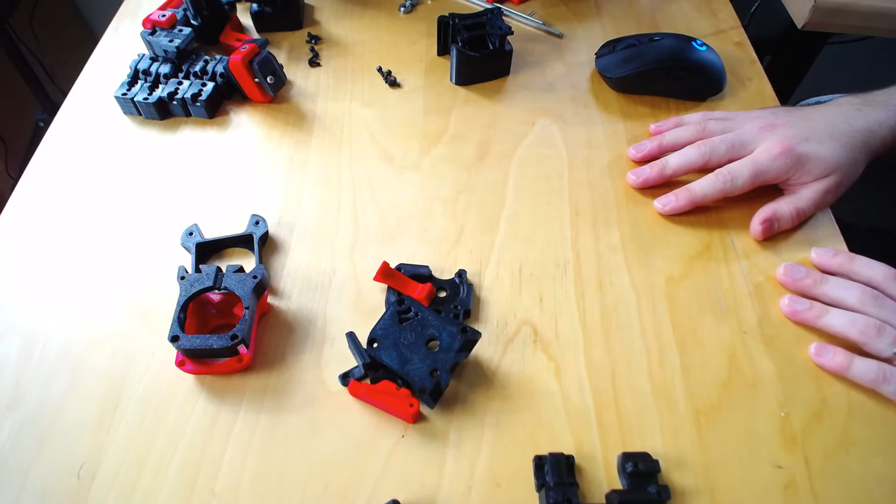Let me switch to this camera. I've increased the brightness here and tried to reduce the contrast some, because I realized whenever I was holding up these parts, the camera's focusing or doing exposure off the bright background, and the black kind of disappears. Hopefully it's a little easier to see this time.

Let's get started with the clockwork module. Let me open up the assembly manual, because I believe I know where all the parts go for the heat sets, which will be the first part, but I want to double check to make sure I don't make a stupid mistake.

One moment, switching over to the monitor. So last time we left off here with some of the Gantry stuff, and let's see here. Perfect.

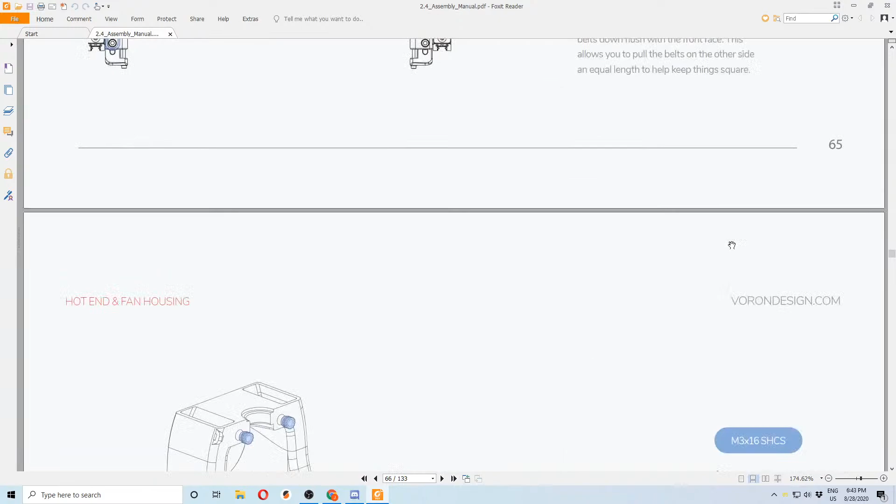So here's the Afterburner section. We'll pass the X carriage for a second here and start with Clockwork. This page here shows the different heat sets we need to insert.

And again, since I'm the glorious person who bought the wrong heat sets, I'm going to be drilling out the heat sets like I did yesterday. I'm going to switch over to this camera for drilling out the holes.

The other thing you may notice, I have 2 separate bags of heat sets. If you remember from the BOM, there were some long heat set inserts and short heat set inserts listed. Since I know some of these parts can fit the long heat sets, even though that's not spec, all you need to buy are the short ones. I'm going to put some long ones in, because I have a lot more long than short, since I've been using the short ones everywhere else.

Before we get started, I recommend testing the fitment of these 2 parts. If you were unlucky and received a very early or one of the first release versions of this part, whenever this lever comes flush with the rest of the part, you'll notice it starts getting pushed upwards. In this case, we're fine, but it's probably going to be really hard to see.

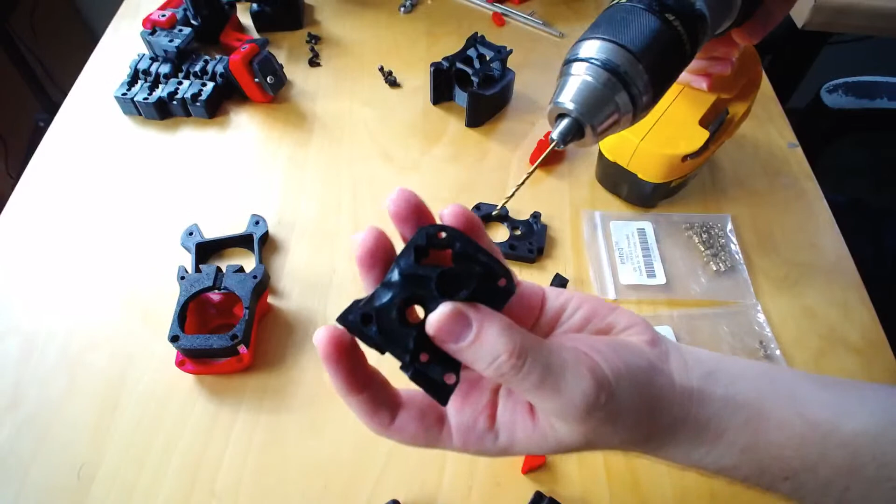This side is a little more restrictive, and most likely your part's going to be fine, but if you over extrude or anything like that, it's better to double check and make sure you can see through it. I'm looking through the part here and I can see the table all the way through, and there's no burrs or anything stopping the filament from going through.

I don't have a piece of filament here with me at the moment, but it's always handy to slide it through as well, just to double check. So there's that, and just a test fit of these parts so you see how they go through.

This is the shuttle here, and the small piece fits in there. Then here's the latch right here. So there's all those parts, and this goes up here like that. Since there's no screws or anything holding it together, that's generally how it ends up. So there's a lot of heat sets in this.

So let's get started. Let me preheat, let me plug in my soldering iron. I did have it preheating, but if you don't plug it in, it doesn't matter if you turn it on, it still won't work. There we go, now it's heating.

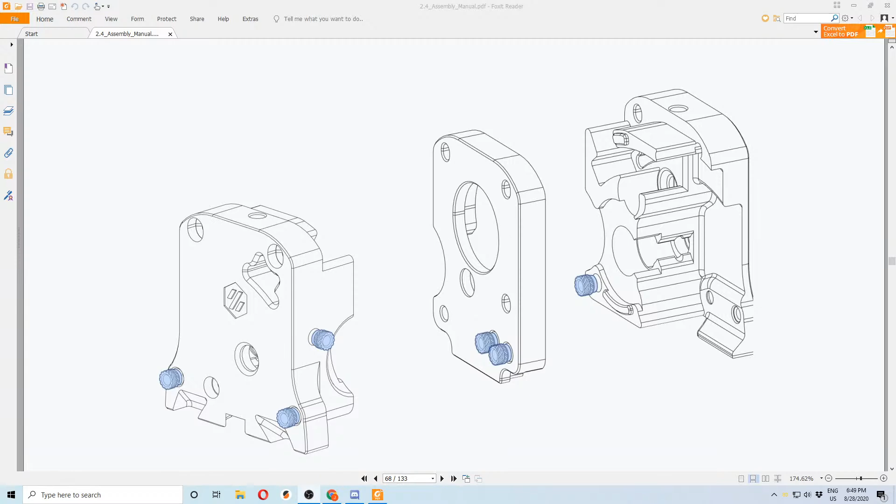Here again, we'll get started with this piece here. So if we jump back over to the overhead camera, that is these two holes right here over on the side.

For some reason that looks strange. Okay, yeah, I just wanted to double check to make sure I was doing it right. So let's, oops, sorry about that if you heard that. I'm just going to go ahead and drill this, and then drill this. Okay, so that's good.

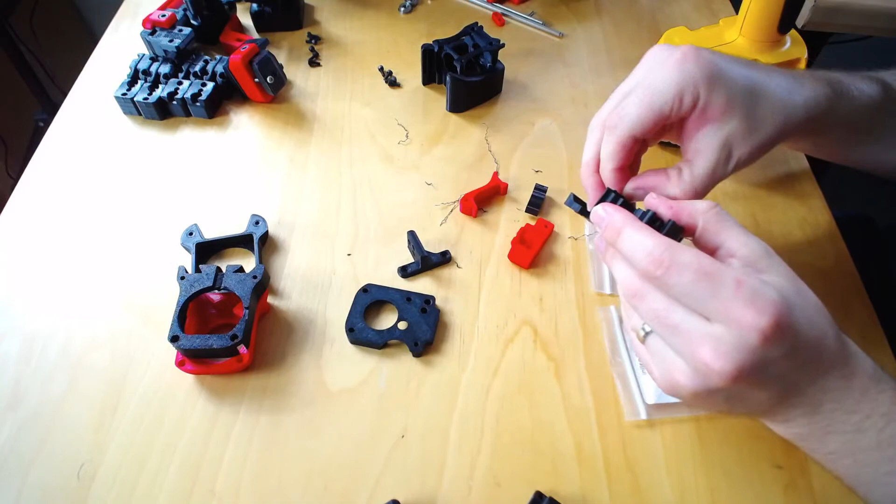And then on this part right here, there are two on these back corners, so I'll drill those out. And then there's also one right here on the front side, and that one's great for the long heat set insert because it's a pretty deep area there. And then the final one is on this side, that's to retain the cable cover.

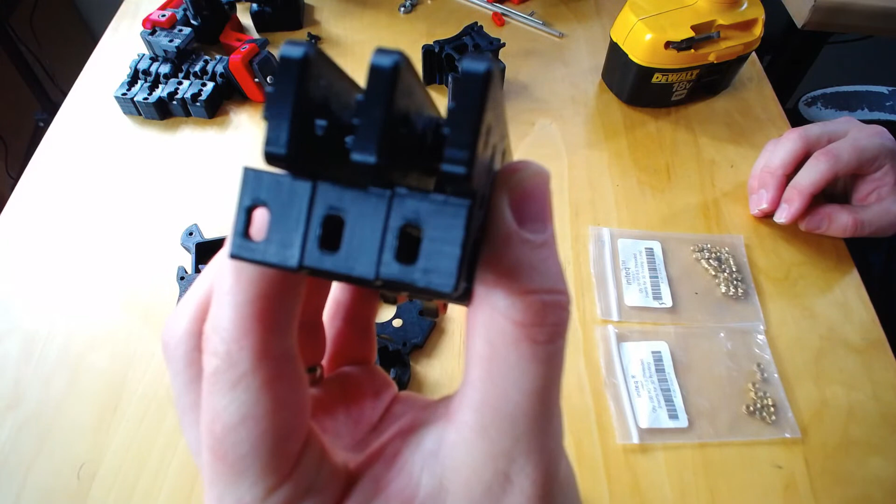These parts all kind of look similar. I was going to do a quick show of different settings, but since these are all black, unfortunately I don't think it's going to focus for me, so you won't be able to... maybe I get lucky, it's a roll of the dice. I wish I could specify where this was going to focus.

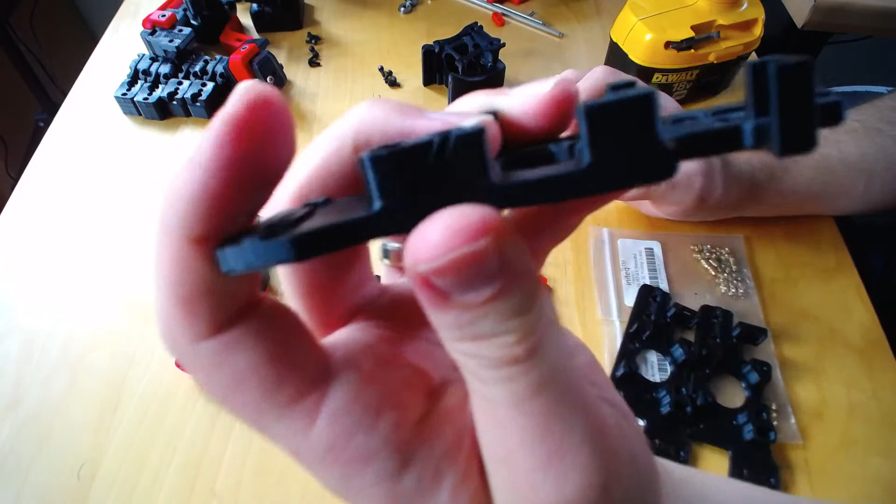But yeah, so the one thing about these AB drive mounts is that right around the base of these parts, there are some ringing features you can see, and depending on how these parts fit together, it can be a nice tuning test to see if your settings are good. And ringing does not affect performance, no, it just looks a little uglier, but it's not bad.

Just drilling out these holes here.

Okay, those are nice and clean. My table is now dirty. This one gets a heat set right on the end there, and that is so your thumb screw goes into that heat set.

And of course this one's probably not going to work very well because I don't have a lot of torque on it. And then this one doesn't need a heat set, and this one also does not need a heat set. So I think I may have completed all of these.

So now we're ready with these parts. Let's see, let me grab the BMG clone from the parts bin.

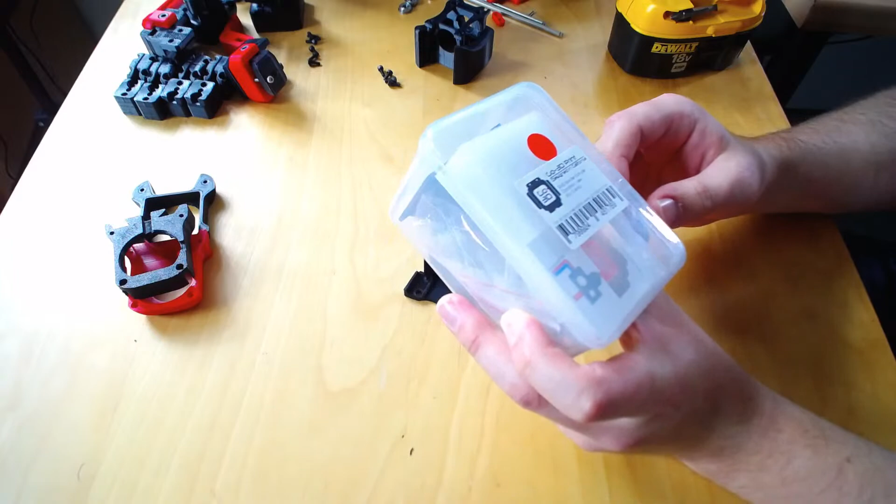One thing here, this is a Go 3D clone, but this brand on Amazon actually does often pick up Triangle Labs parts, so even if you look at it, let's see if it'll show up. Probably not. But the SKU number right there actually says TLBMG, which I'm assuming stands for Triangle Labs BMG.

I bought a Dragon from Triangle Labs and a Dragon from Go 3D, and if you peel off this front sticker, this QR code here behind the sticker is actually the same. So this is definitely a Triangle Labs BMG clone.

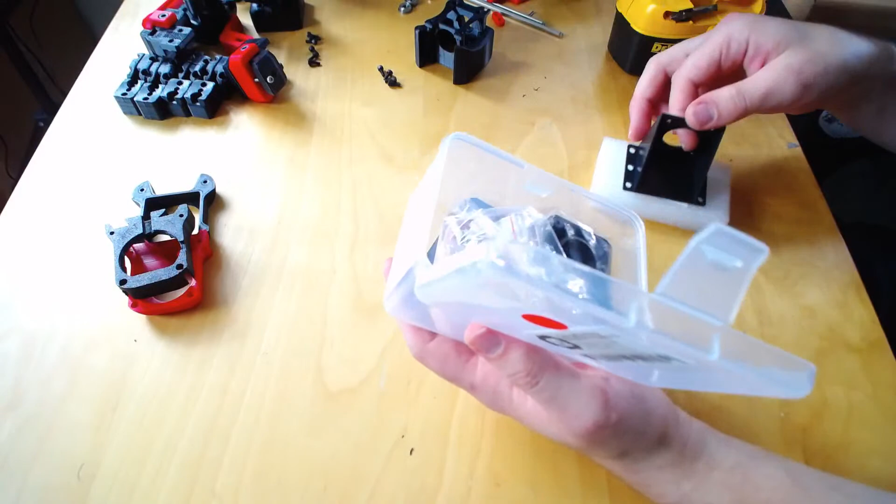I generally am more comfortable with Triangle Labs than a lot of other suppliers. So it's nice that there's something on Amazon that can get picked up with 2-day shipping if you need it quick.

Let's see here. So there's a few parts here, most of which we'll need, but a lot of the stuff we will not.

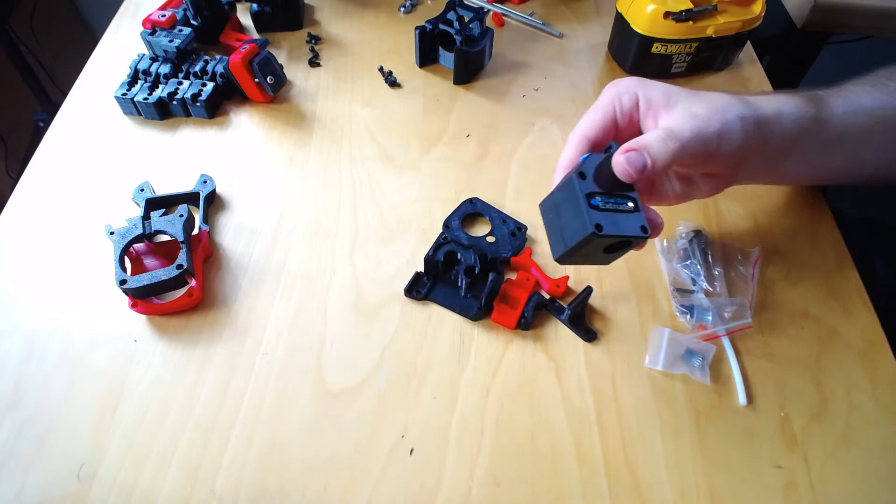So this part here, it is not screwed together, but we will separate it. Here we need this piece, which is the main gear. And then we need the idler gear here.

I'm actually going to grab my flathead screwdriver here to help snap this off, because it can get a little tricky. Assuming I don't... maybe I'll just push it through.

There we go. So I just pushed down on the pin, and it slid it out just a little bit. I should have actually pushed the opposite direction.

So there's that. This will have 2 small bearings in it, so be careful about that. And you'll need that pin.

And then before we toss these plastic parts here, we don't need this pin, but we do need this bearing right here. So you can get something and just push it out a bit. Sometimes it will come out on its own with this, but sometimes it doesn't.

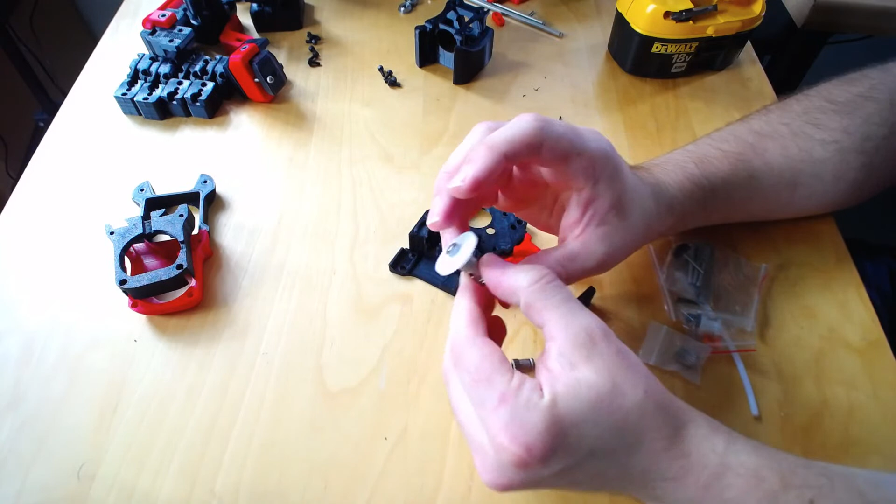In our case, they're not really handling any load, but it's still good to be careful. So that's good. The one thing you'll note here is that there's a substantial gap between the white gear and the drive bearing right here, and that gap is something we do not want.

So what I'm going to do is find my hex wrenches and hope I have the right size here on hand. I don't really want to use a ball hex on this since it's a really tiny grub screw, but I'm just going to slightly loosen that up.

And then I'm going to slide this drive gear all the way against the white gear, so there's no gap. And then we'll just tighten it up. Again, it doesn't have to be super tight. There is a flat on this shaft, which helps, but it's generally best not to strip that.

Okay, so now we have this with a bearing on that side and a bearing on this side, which is great. Let's see here, and then we'll just test fit. It should fit right in here nicely. It's loose on this side because this is the bearing. So that should go nicely. And then another great question.

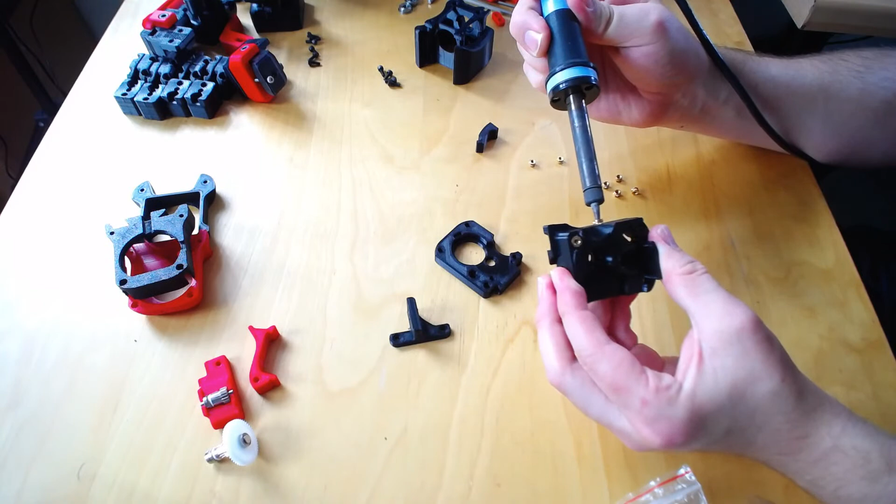Okay, and remember that they're still hot after you take off the soldering iron, so don't burn yourself, because I have. Again, heating it up until it starts moving, then before it gets fully inserted, push it in the rest of the way with the edge of the table. Again, this one has that curvature, so I have to use the edge of the table. That one's looking really nice.

And again, this looks so much better now that I drilled them out, because for the longest time I didn't realize I had the wrong heat sets, and I was so confused as to why everything was looking like complete crap. Then once I figured that out, it worked much better.

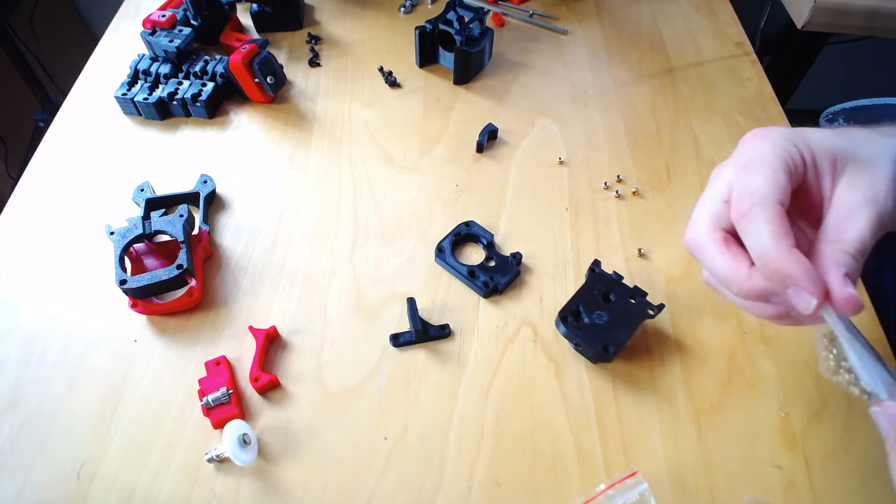So I drilled this hole out just a little bit deeper, because I want to use, I think, a long heat set there. I really need to order some more. Okay, that one's ready, and I keep touching other heat sets that I put in that are still hot.

Will I ever do something like this for electrical wiring? I was actually just thinking about that.

So after we get the gantry installed, really the next thing after running belts is essentially running all the wires for the XY joint to the tool head, all those different things. And that's usually a part that is really, really mind-numbingly painful, and I tried to avoid it as much as possible. It isn't necessarily the most interesting thing for a stream, but at the same point, it's probably one of those places where we don't really talk about much. It's just more like, just do it.

So if you think it would be useful, might as well have company the whole time I'm doing it, and you can ask questions or do Q&A and something like that. So, I'd be sitting here by myself otherwise.

So okay, there's heat sets for that one. We'll do it for this one next, and these. Let me just double check if I can put a longer one.

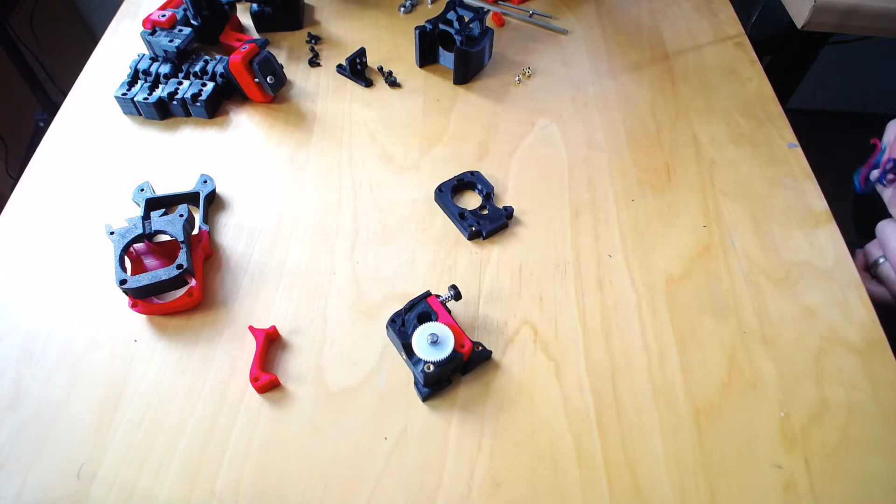Your videos will come sooner than Ollie's stuff. Yeah, we'll see how that goes. This week it's been fun because I kind of want to just get this done because he's been waiting for such a long time.

And also I'd be working on it by myself anyway, so I might as well just stream it now that I have everything set up.

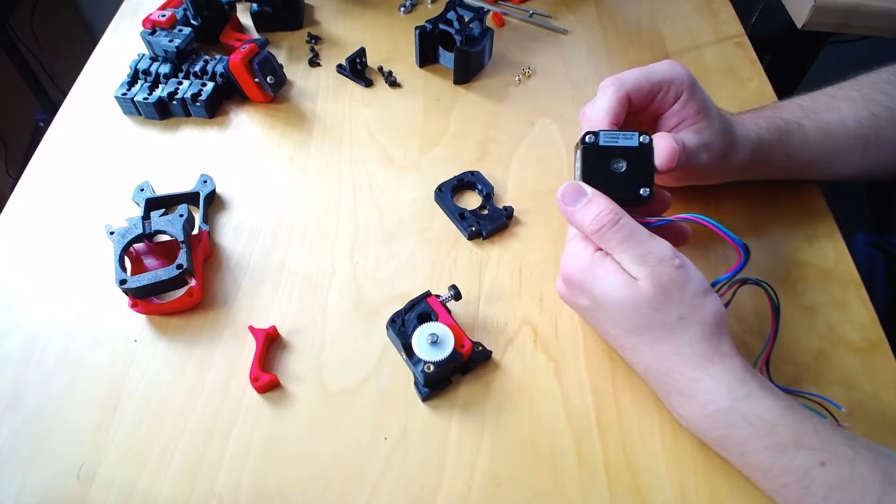So this is not the right motor. It is a HM17HM08 1204S. It is almost the same form factor, so we'll use it as an example, because that is what I have on hand right now.

Today's Amazon shipment was some new LED lights to go on my umbrellas, to hopefully brighten things up a little bit more. I got a cheap fluorescent kit that was nice, but it looked green and they were not very bright.

So let's see here. With this one, again, this is not the spec motor. So if you'll notice, it actually does not have a flat on it, which is not the end of the world. It's not great, it's not terrible. But we will use it right now anyway.

So let's see if this is the right size. Oh, it's too small. That means this size is the correct size. Okay, so for this, let me just see if there's anything in the manual that specifies where or how far on this shaft it should be.

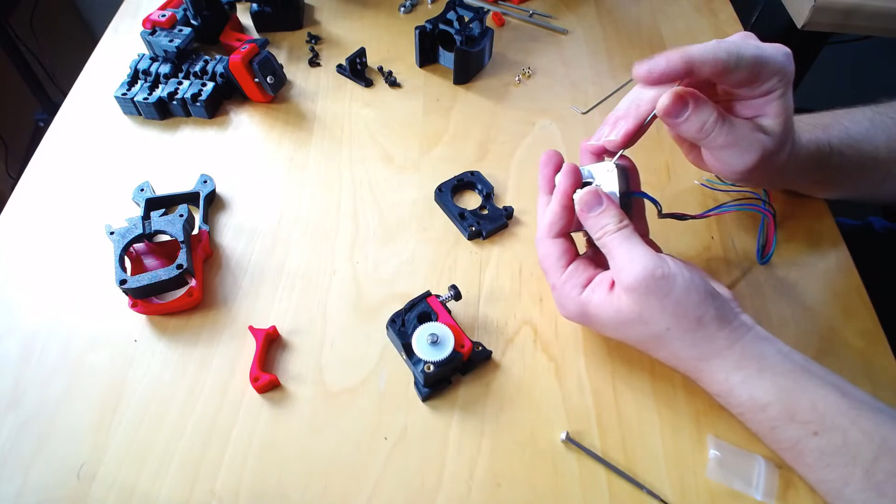So it doesn't specify exactly the position of this gear. What I did here is I didn't have it quite up against this black part, and actually I've done it the wrong way around, so don't follow me - that's why you read the manual. This part has to rotate around 180 degrees, but I'm not going to have it completely flush because then it would be grinding or rubbing against this. So I'm going to move it out just a hair and then tighten it down.

Okay, so for this we need to put this motor piece on the stepper motor, but you want to be aware of what direction this motor is going to be.

I have not ordered a keyback for the switch wire, but with this you want to make sure your wiring is exiting the motor in the correct place. Essentially how this is going to work is this chain mount is going to be on the back, and then the chain is going to loop around - the wires are going to go back and around. Typically I'll line up my wires off to the side right here so they can go easily into the cable chain. If you have it pointing downward it may rub, it may be fine, but again, there's good things and bad things.

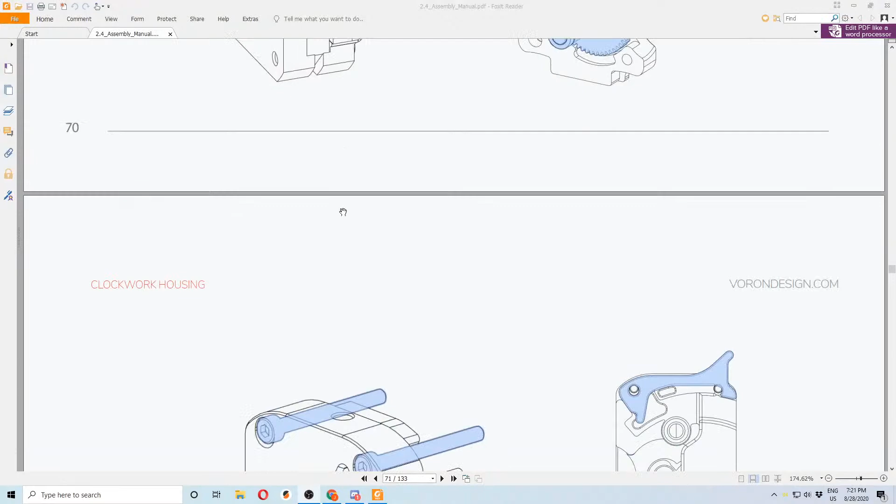So let's jump back to, let's see here, where are we? So we've done that. Okay, so we need 3 M3x30 screws, and I will hunt those down here.

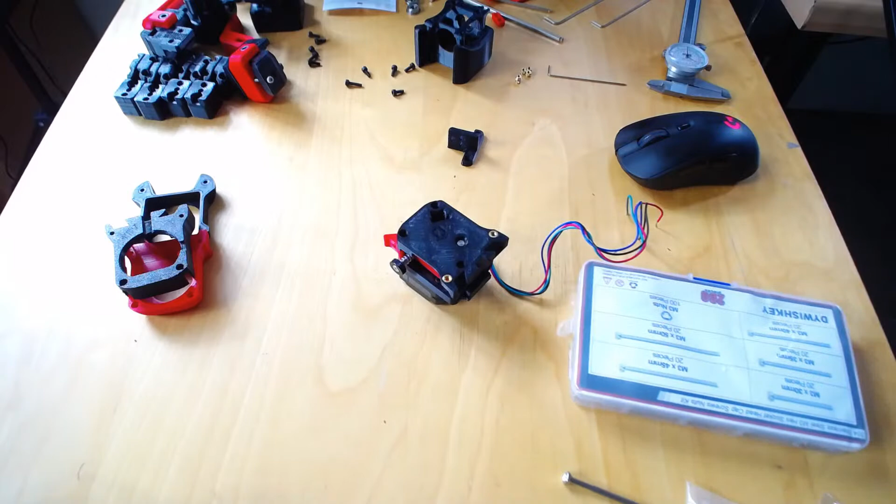Thankfully this time I have my caliper so I can kind of measure these and see if I'm in the ballpark. And yes, I am. Perfect.

So we'll drop that through. How about this, is this also the same length? Yep, this is golden. And this one here through too. So there's that.

Then we'll tighten that in, just kind of loose now, just until it's a little snug.

So you'll note that this screw actually sticks back through the back plate there, and that's fine. That's actually how it was intended, because otherwise, if you wanted a perfect screw there, you would have to get an M3x25, and that would be the only M3x25 screw you'd have, which would be ridiculous. So what we did instead is there's actually a small cutout right here on the X carriage, so that'll work.

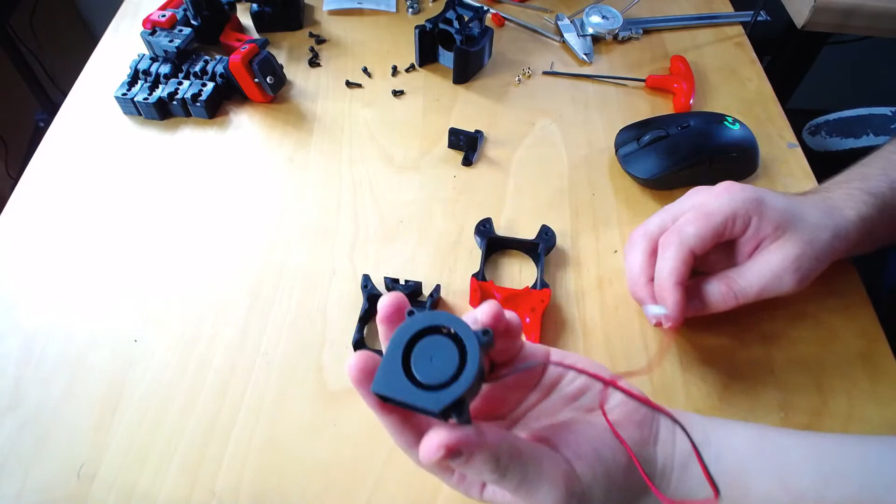So in this case, we actually take off this front. And the easiest way in general to do this is just grab a flathead screwdriver and just kind of try to pry underneath here, like that, and then just work your way around. Like that. So that pops off, which is great.

We don't need that. And then this spins freely. It's centered. It doesn't wobble. All those things are good. And then the last thing

here is when this goes in, this wire has to come through the back. And if I remember correctly, depending on, yeah, this part actually might be updated. Maybe it won't. It depends on your fan. You may be able to get away with this, and you may not.

This one kind of feels like, yeah, I'm going to have to snip this little piece off, which is a little unfortunate because the strain relief is nice to have, because these wires, especially down here where they're soldered to the PCB back here, are quite fragile. So really be careful.

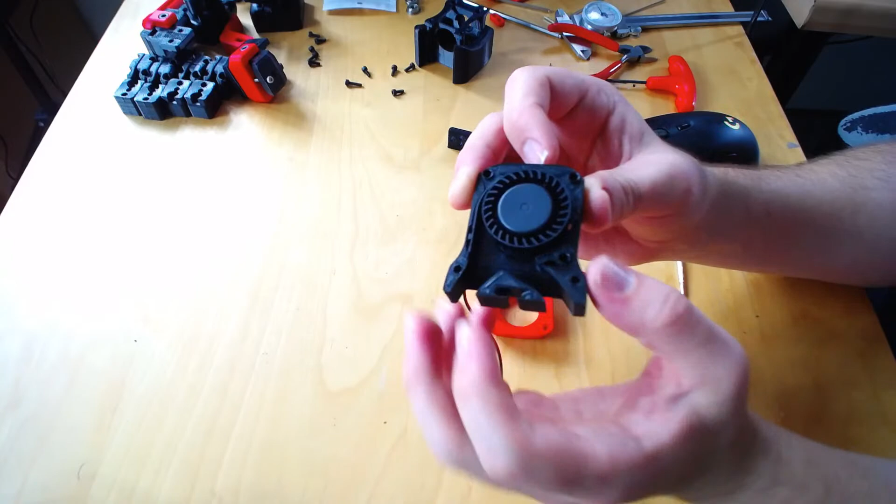So there's that. Then here on the front section, this is just kind of a press fit.

Depending on your printer or a part, it may fit tighter or looser. VHB type tape would also be a great idea. And then the thing here is...

This wire here will need to basically, let's see, fit together. So this wire needs to come back through this slot right here, which is nice. There's a slot, and then this will sit down on top of that, and everything will fit like that.

So we'll grab the screws to hold this back piece on the front. I don't have a piece of filament right now handy, but essentially with that, you would just fish the filament through the hole there, line up the parts, and that'll be your kind of hinge there, which works well.

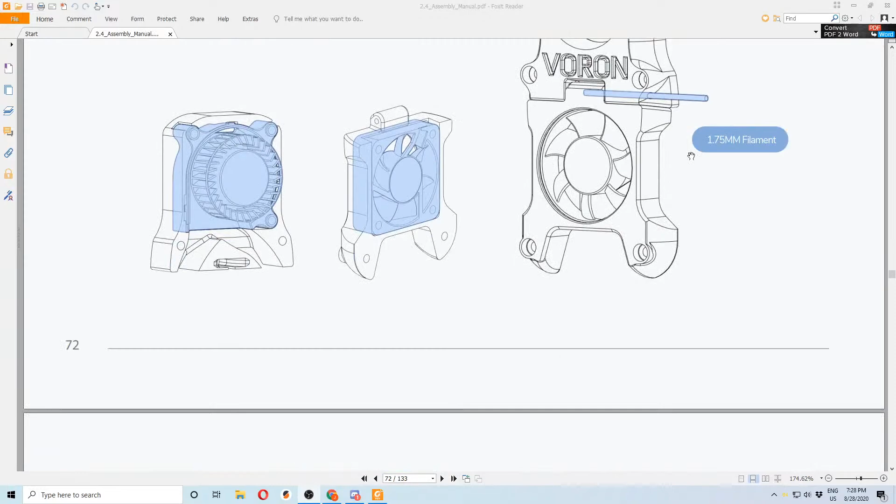I'm going to switch over to the monitor here for a second. Yeah, see, that's where it shows the filament sliding through those as a hinge.

So it is M3 by 16. Let me find that with my trusty calipers. Found two. Well, I found a 20.

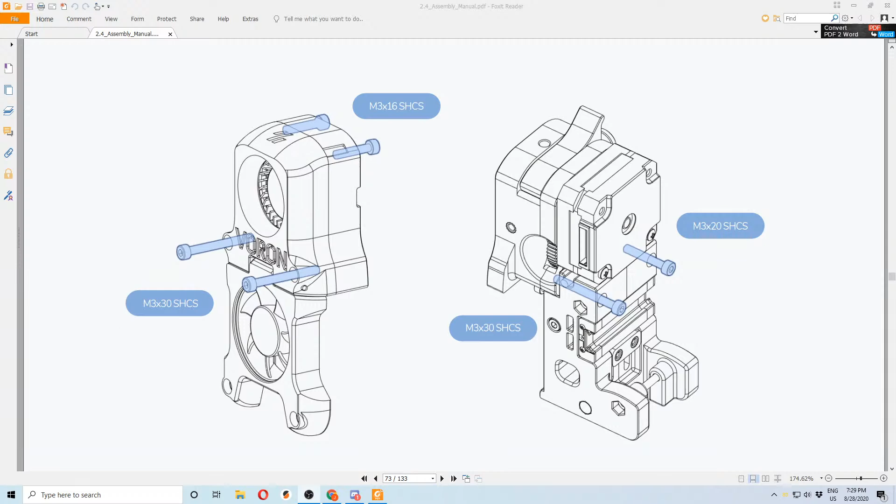If you have an earlier version of this part, you may have heat sets in the red section, but on the later versions, those were a pain, so we do not use those anymore.

So in this case, these will just thread into the plastic on the front. You may have to press just a little bit for them to grab and start that thread.

And again, since this is a plastic threaded part, you want to make sure not to tighten it down too hard. You don't want to strip it out, so just be careful about the torque you use.

As long as everything kind of is lined up here, all the seams look good, which it does there, then we're solid. And again, when you're routing this, the red wire would come up through there, and then it comes up through this back channel, and out the side where it can go to the rest of your tool head.

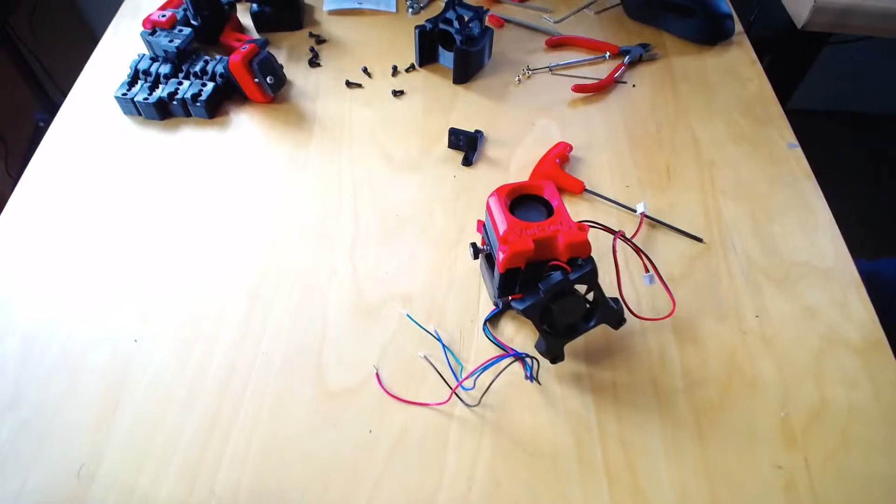Fortunately, at least with the 4010 blower on the front, the axial fan on the front, there's really less of a risk since there is still a strain relief on that. So tighten that down, just snug. And that looks really nice.

Let's see here. And again, in my case, I would take off that logo because it looks ugly, in my opinion. So that's that, we have that piece.

Now let's go ahead and do the x-axis. So this is fairly simple. I will actually worry about those later when we're doing the belting. But for now, we do have some holes that need to be, or two heat sets here, both these bottom ones. So I'm going to go ahead and drill those just a little bigger.

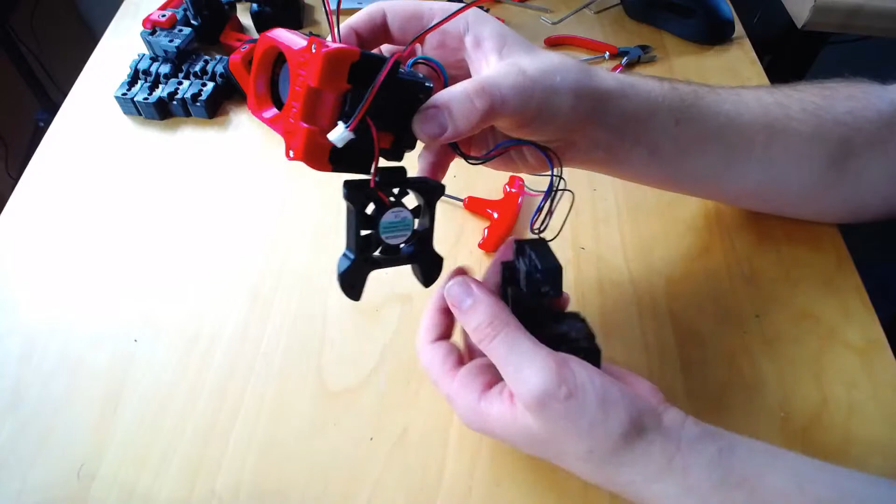I'm going to go ahead and worry about those in a bit. So that's done. This will... as long as I'm not going to break this, I swear. But for the sake of the YouTube stream, here we go. So that goes like that.

And then I'm going to get, there are actually 2 sizes of screws. One is an M3x20 that goes on the bottom side in this view, and then an M3x30 that goes on the top.

Yeah, per your question, getting the gantry to not bind at all when it's moving around, and getting the bearings to move freely, that's probably one of the biggest places where you should spend time to get it right.

Okay, so here's a 20. So here we're going to put the 30 there and the 20 there, and then tighten those, hopefully.

So the reason the 30 is longer is it actually goes through this motor mount and all the way to the main section of clockwork. So that's tight. And then on this side, this screw only goes into this back section here, so it doesn't need to be as long.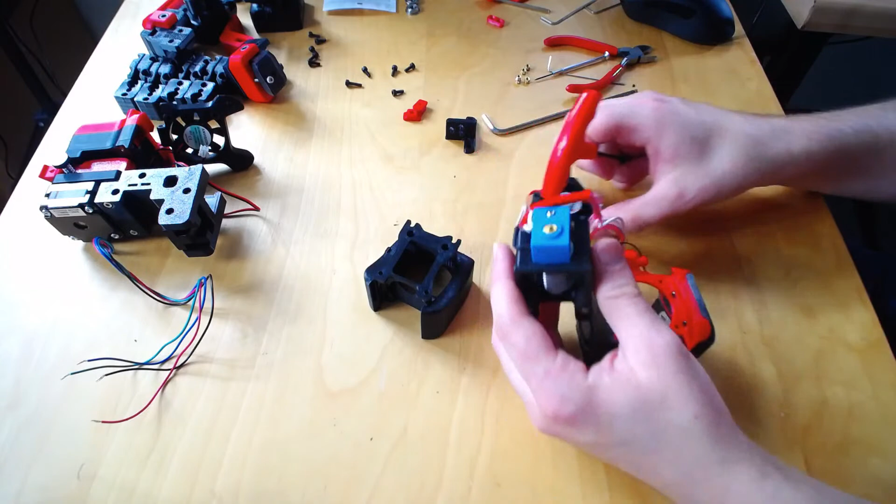This is the frustrating part about, or one of the things that is less nice about V2.2, is that each tool head has not only the hot end, but it also has all your fans as well. So there's a lot more wiring, and also depending how high quality.

Okay, if I dropped out there a bit, hopefully I came back. It said it lost connection, but it's back. So sorry about that if you lost it for a second. But...

Yeah, so depending on how expensive your fans were that you bought for V2.2, it could add up quickly. Like if you were getting $15 cooling fans and a $10 hot end fan, plus your hot end itself, that could add up quite significantly. Versus now, it's literally just the hot end, heater, and thermistor, which is nice.

Yeah, depending - so I started printing on my 2.4 parts the other day. Estimated total is 140 hours. Depending on your printer and your print speeds, it can take a considerable amount of time to print these parts.

And that is one of the reasons why PIF is kind of a thing and why it's really nice. Again, I mentioned in a previous stream that the owner of this printer has some friends with Prusa printers, which are great. No discussion there, Prusas are great.

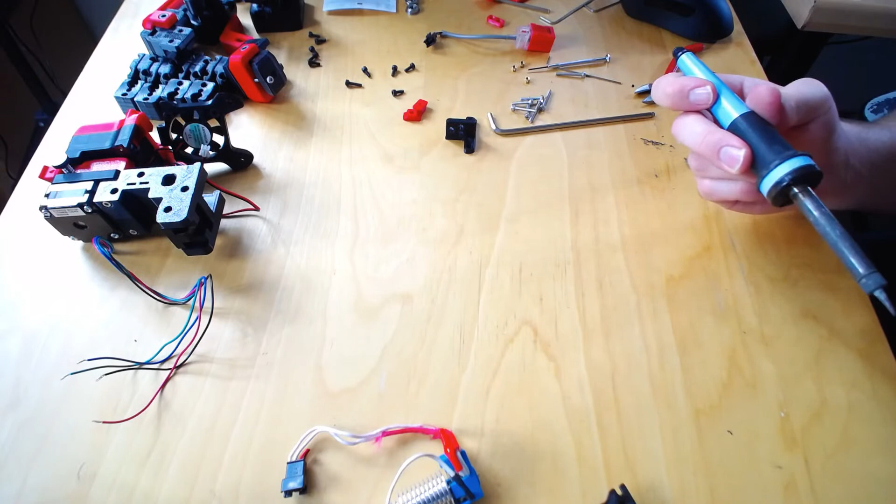So the PL08 I had back in the day, which I don't honestly remember where I got it, but it was one of the cheap ones for sure, it shifted around a lot. It was quite considerable.

But then the PL05 I got, those seemed to be pretty good, so I used those for a while. And then I heard about the Omrons, and I was like, oh my goodness, I must have one because everyone's talking about them. And granted, I got them all from the same exact set. So I had 4 samples from the same, I think, 10-pack. But all 4 of them died.

So I'd encourage you to always have spares, and if possible, have spares even of different types. I think with the Omron probe I had, it was a normally open probe, so I crashed the tool head every time it failed, which is not very fun. So take that for what you will, I think the key is to order probes.

I'd buy the PL05, PL08, and maybe an Omron. That's maybe $20 to get all 3 of them, or $25. And you can, yeah, that's hot. You can kind of see how it goes, but that would be my personal recommendation.

And then do that probe accuracy test via temperature and see which one works best for you on your printer and your batch. Because ultimately, you have to remember that all of these parts are susceptible to variation in manufacturing and batch to batch.

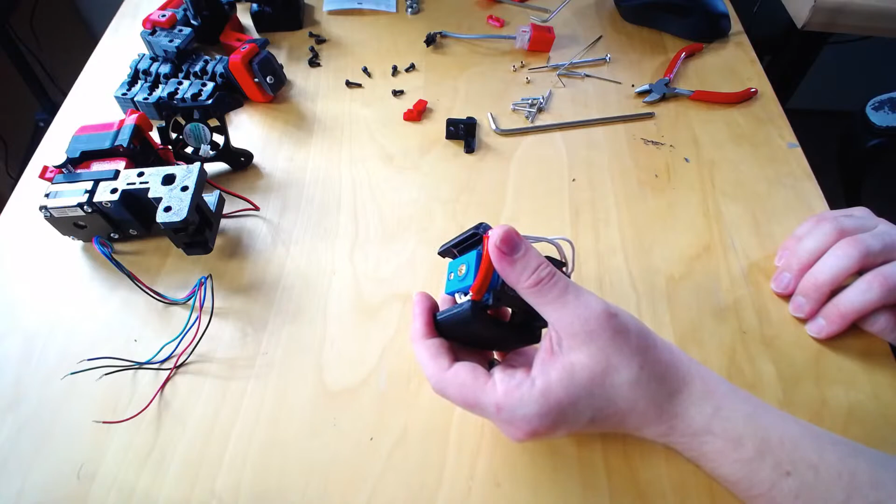Zenbender, if you only have one guess, what's going to break? Can you give me more specifics? Break on a Voron printer, on a tool head, on plastic printed parts? Give me a little more specifics there.

So on the hot end topic, everyone talks about the Dragon. What do you think?

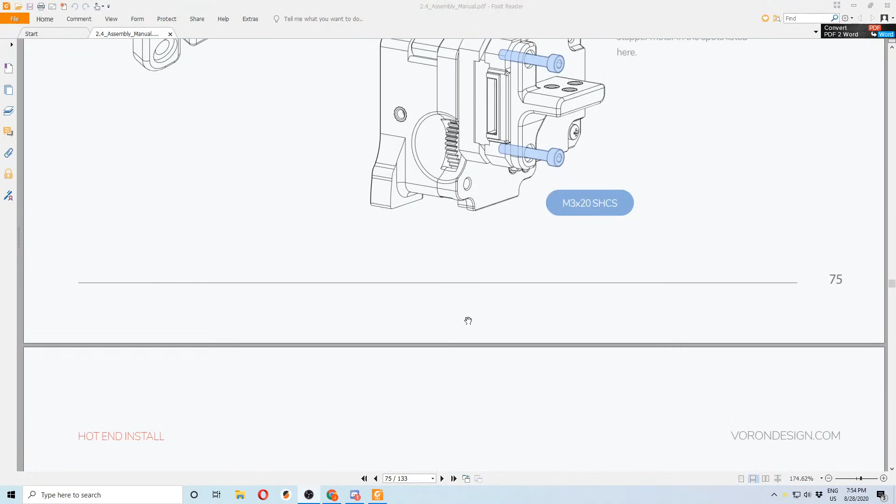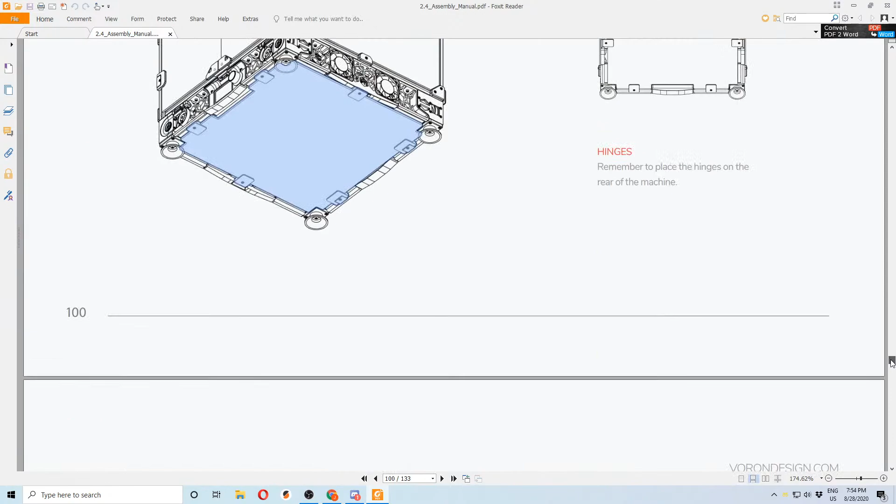If you guys know me, typically my general rule of thumb is that if you can find something that is cheap and does just as good of a job as something expensive, there's no need to spend money on stuff that doesn't actually make a difference. At the same time, if there's something that does make a difference, like going 24 volts and the 2208s, that is a huge difference, and I highly recommend it. All that's to say, I don't spend money on something unless I have to.

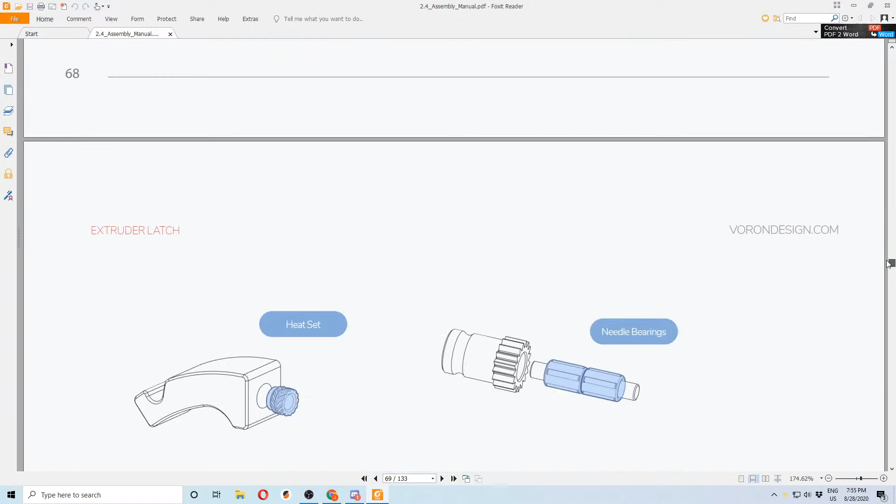And then essentially I had my heater block come loose, and my nozzle was wobbling around, making kind of weird print quality issues that I couldn't diagnose for a while. And then I just had a massive blob of plastic about this big that consumed everything in the bottom of the tool head, including my probe, melted like halfway across. So at that point I was like, I print enough, and I'm tuning stuff enough, that I don't want to ever deal with the hot end coming loose from the heat break.

So I said screw it, and I have 2 Dragons on both my printers. The V2.4 I will be building does have a V6, and I just want to print with the stock again, just because I'm trying to review the kit and see how things go. But down the line I'll probably replace it with the Dragon when it's on sale.

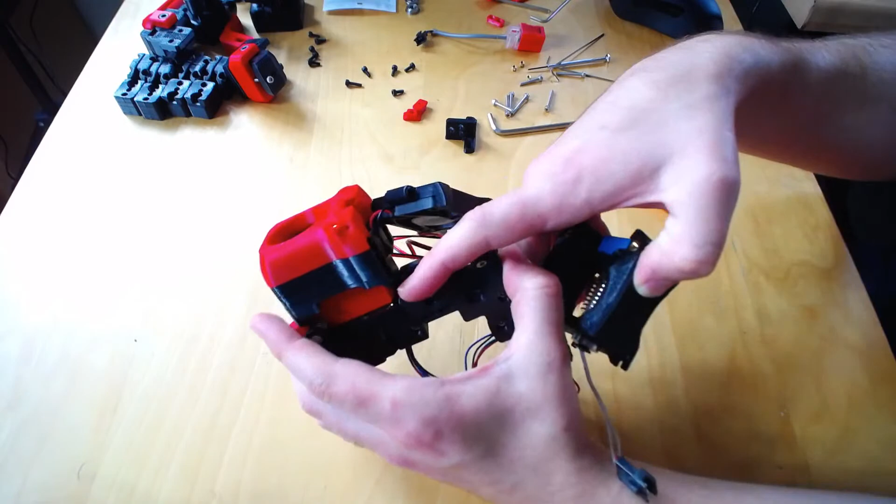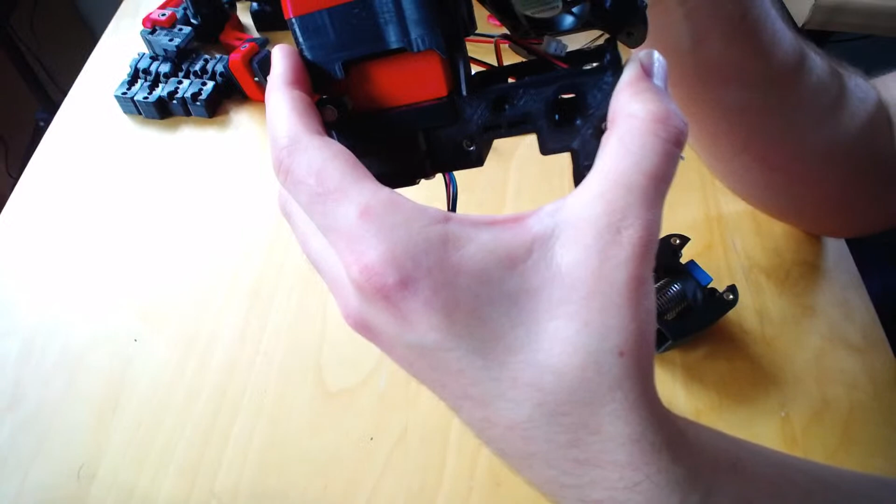Again, I have not put in the two screws up here yet. The screws that fit right in here do not hold the tool head in place, so you do not tighten them after you install your tool head. They are only locating slots. The tool head slides up into those tabs, which prevent it from going side to side, rotating, or coming out too far. You want them to constrain the tool head and not be super loose, but you don't want them to actually compress the tab at all.

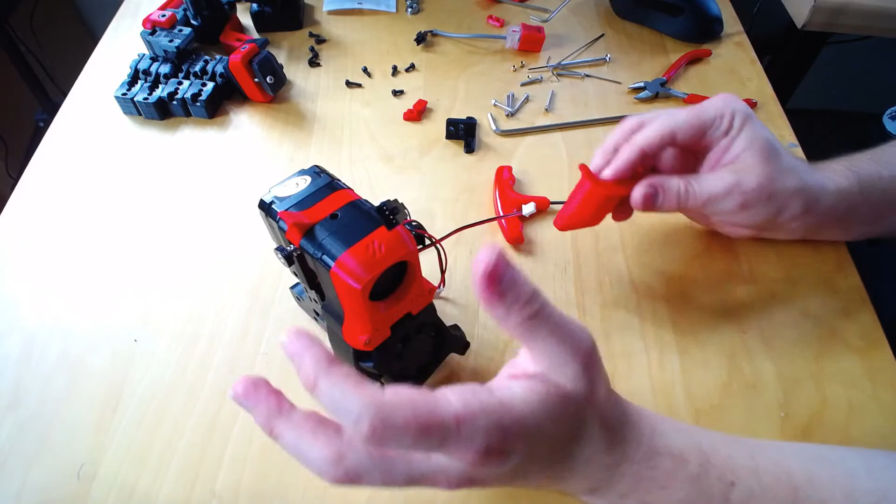From this standpoint, I have not put the probe in there either, but just trying to get an approximate view of where we are right now. The probe sits down here. Wires would be dressed up a little better, and your cable cover, which is right here, will be back over there. All your wires typically come up through, then back across, and into your cable chain. Granted, I haven't done everything to this yet, so it's not perfect, but it generally gets the idea down.

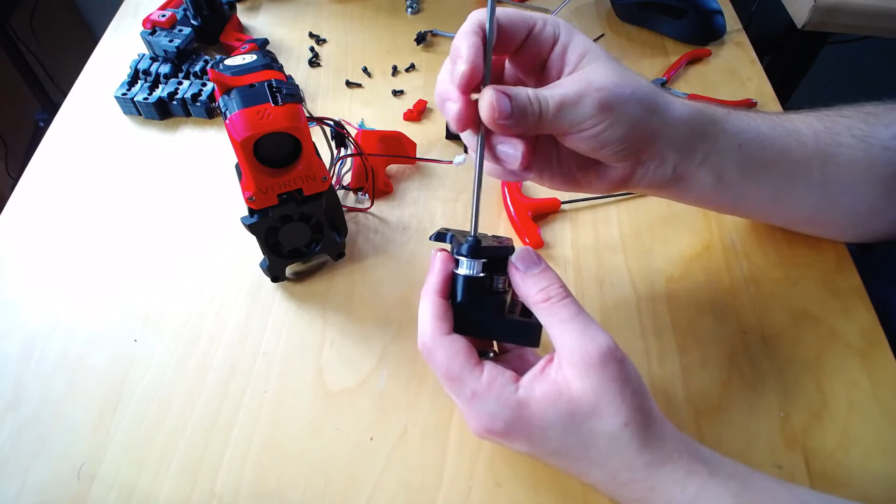Again, I do have these pulleys here. I'll just throw these on because it'll take two seconds, and I wasn't able to do that yesterday. We assembled the XY joints yesterday, except for these. So I'm going to loosen up the bolts here, slide this in, and drop this down in like that. Again, we're not going to tighten this bolt down entirely, just snug it up. This will have some play up and down, but once it's under tension, it should self-center. The reason it has a little more play than you'd expect is because Gates idlers are slightly taller than these — I think these are Winson or just generic China idlers — so that's why there's a bit more vertical room than you'd think. I'll go ahead and put this one on as well.

So as of now, we have most of the gantry kind of getting there. Probably on the next stream we'll get the extrusions put on. We'll use these Z blocks here floating to mount those extrusions to the Z rails, which will be good, and at least we'll get as much stuff mounted as we can. Essentially, my plan is to mount the Y extrusions, the XY joints, and the X-axis temporarily to the printer next stream.